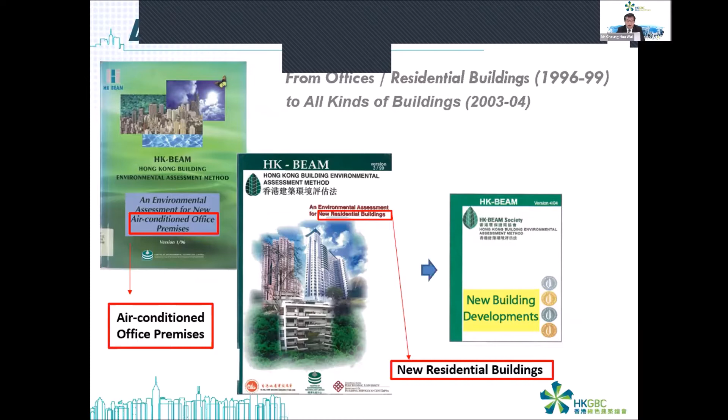Throughout the years, we have been developing the rating system in alignment with the life cycle coverage of green building development. The life cycle coverage includes the initial planning stage of any building development, then design and construction, then upon completion the operation and maintenance of existing buildings, and also throughout the lifetime of a building, fitting out and alteration and additions to existing buildings.

For each of these stages of building development, we have developed an individual rating system. Firstly, for planning, we have a BEAM Plus Neighborhood rating method. For construction and design stage, we have the BEAM Plus New Building rating system. Upon completion, we have BEAM Plus Existing Buildings to deal with the operation and maintenance stage. And finally, throughout its lifetime, we have BEAM Plus Interior, which deals with any interior fitting out and alteration work to existing buildings.

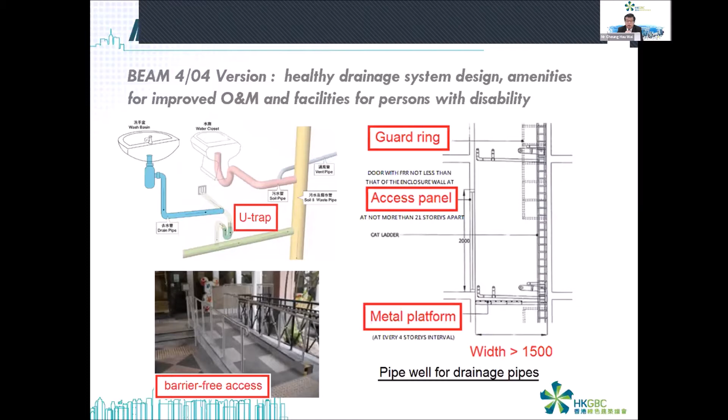The rating system not only covers green building aspects, but also in some way health and safety requirements. As you could see from the screen, there are credits given if a development incorporates certain safety features in buildings, like the provision of guard ring and access for plumbing systems in buildings, the provision of access panel to these fitting outs, and also provision of metal platform for providing a safe working place for inspection and maintenance of drainage systems in buildings.

One of the very important aspects in our densely built environment, like in Hong Kong, is paying a lot of attention to ensuring the movement and utilization of natural air ventilation. So we have issued an urban microclimate study guidebook to provide guidance on how we should dispose our buildings, how they should be sited, how they should be separated sufficiently to allow natural air to run through our built environment, so that there is sufficient natural ventilation within buildings.

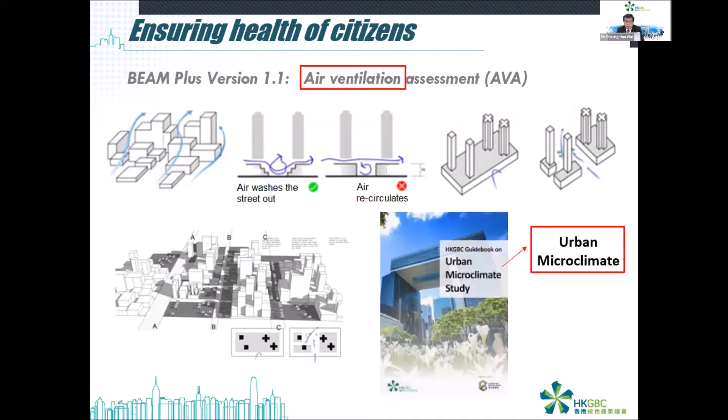Within buildings, there are requirements to deal with the provision of sufficient windows for our living and working environment. There is the need for providing windows in separate parts of our internal environment, such that different parts of the building are adequately lighted and ventilated. These are the requirements to provide cross ventilation within buildings, so that windows are not sited too far apart.

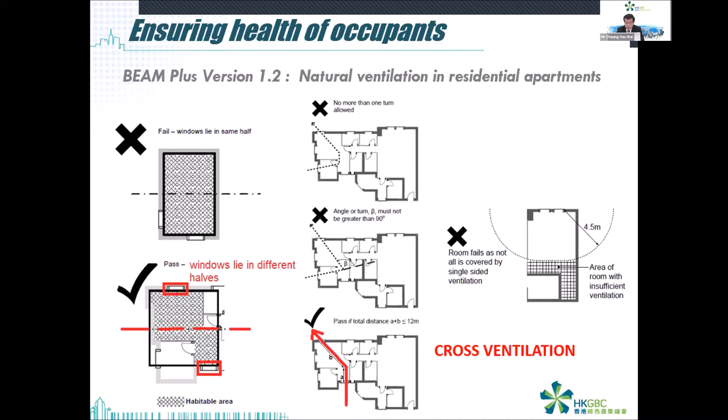There are also credits given for biophilic design, ensuring health and active living and working environment within buildings and also outside buildings.

After the completion of a new building, and also in order to cater for the very large number of existing buildings in Hong Kong which haven't gone through the BEAM Plus new building rating system, there is a very need for retrofitting and recommissioning the electrical and energy use systems in buildings.

So we have started, in the last 3 years, a scheme for retro-commissioning existing buildings. Existing buildings use almost 90% of Hong Kong's electricity, so we believe merely by retro-commissioning, without replacing or renewing the mechanical system, we can achieve a certain amount of saving in energy use.

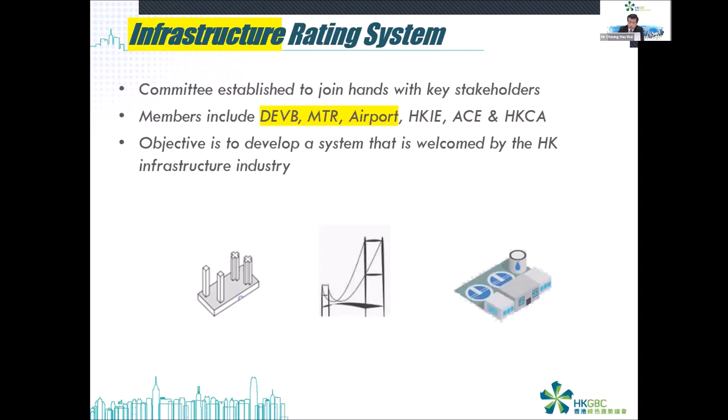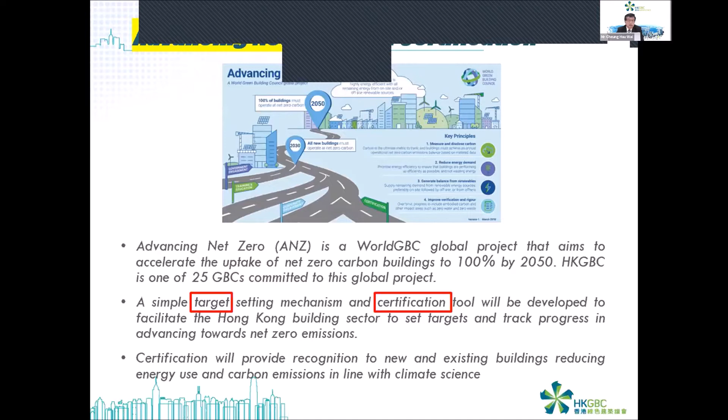Advancing net zero is a new subject which has been advocated by the World Green Building Council, the Hong Kong government itself, and in a way by the United Nations. So we are having a fresh look as to how we should take forward the green building movement and design through the concept of advancing net zero. That is another subject we are having a new look at.

The initial idea is we are considering setting targets for reducing carbon emission in our existing buildings, and also the necessary tools for inducing the reduction of carbon emission.

Contribution of Hong Kong BEAM towards occupational health and safety. In the new version of BEAM Plus, version 2.0, which was only published last year, we have introduced assessing buildability and constructability in the rating system.

As you are well aware, where a building is buildable, then it's safer for its erection. So we think that buildability is not only for efficiency, but also for safety. There are credits given for buildings which incorporate this concept.

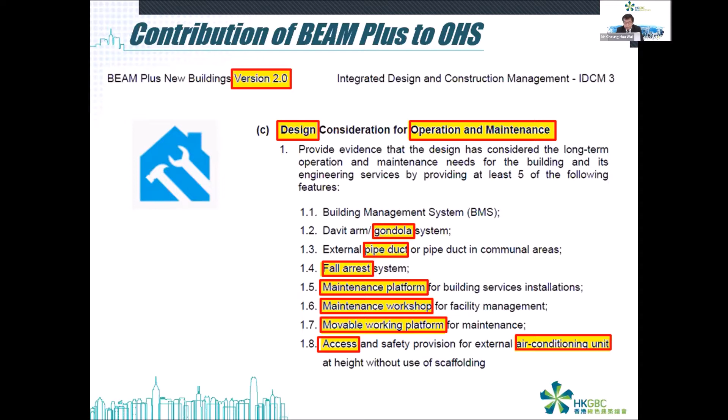In the new version, there is a special section on health and well-being, which requires the provision of sufficient ventilation within buildings, health and active living space, and also inclusive designs for enhancing ventilation and waste disposal, and hopefully in the future waste reuse in the whole built environment.

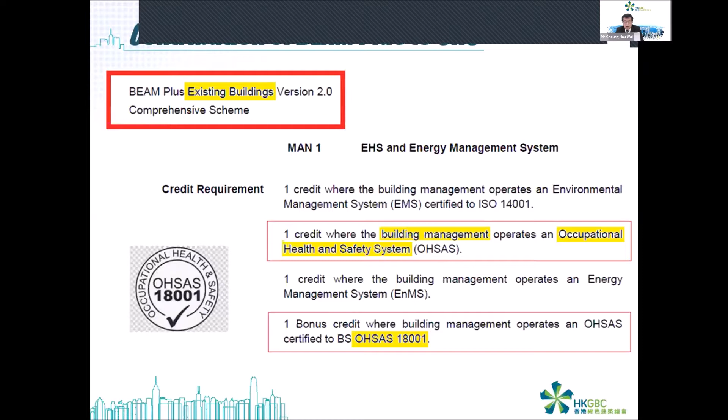In the new existing BEAM Plus rating system, there is also credit given for operating an occupational health and safety system. There are also credits given for OHSAS 18001, being awarded bonus credits.

In the BEAM Plus interior fitting out work, there is a requirement for a safety management plan so that risk assessment is carried out before any fitting out work or alteration work, and a requirement for the provision of personal protective equipment in existing buildings.

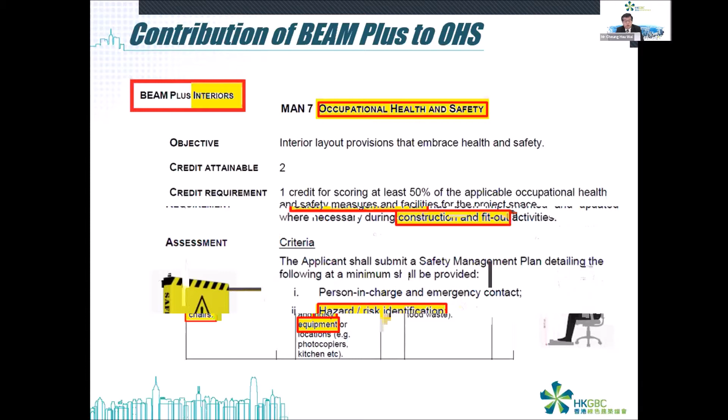In the BEAM Plus existing interior design, there are also requirements to ensure and encourage a healthy and safe working environment, in terms of the provision of adjustable chairs, sound barriers, and also bins for organic waste.

A thought on pay for safety. Actually, before I move on to green buildings, in the Hong Kong Green Building Council I have been working on construction safety in the Hong Kong Construction Industry Council for some years.

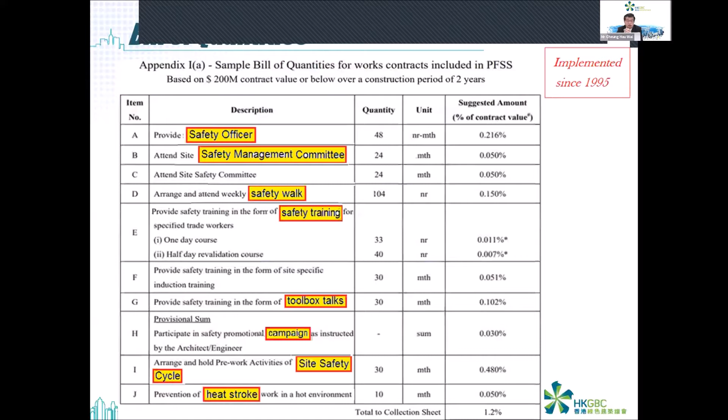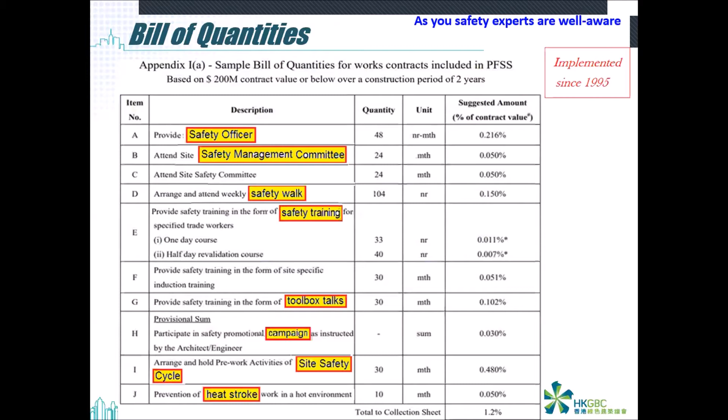So I have always had in my mind how we should be able to improve construction safety. Currently, there is already provision in bills of quantities in Hong Kong to cover the provision of safety officer, safety management committee, safety walk, safety training, toolbox talks, and campaigns in the bills of quantities, so that these safety measures are sufficiently quantified and paid for in a separate bills of quantity dealing with these construction safety requirements.

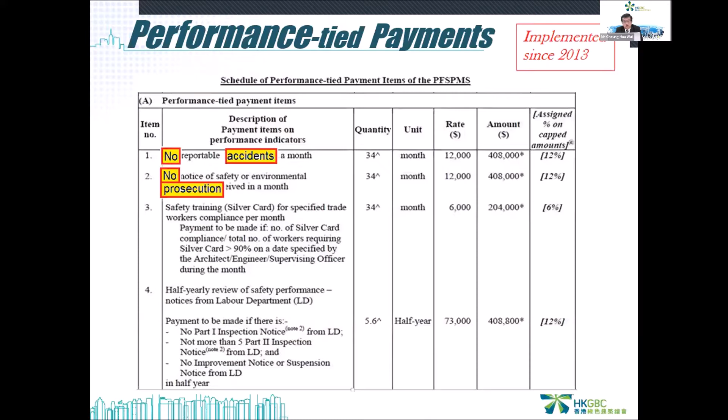There are also rewards or penalties if there was no accident on a construction site and no prosecution for unsafe working methods on the construction site, also provided for in the bills of quantity.

So what I have further thoughts on is, in order to provide a safe working environment on construction sites, as you're probably well aware, better than me, there is a need for safe working platforms, safe working procedures, and safe methods for executing the many different parts and phases of our construction work.

Now, if these safety equipment and provisions on construction sites, and also safe working methods, are separately and sufficiently allowed for in our bills of quantity, then there is a strong incentive for our contractors and workers to adequately provide these safety working equipment on construction sites, and also allow sufficient time for safe working procedures to be followed, so that once these are provided and followed, it's paid for by the developer through the bills of quantity. Then we should be able to have a pay for safety system, hopefully covering the many safety aspects that need pay and cost on our construction sites.

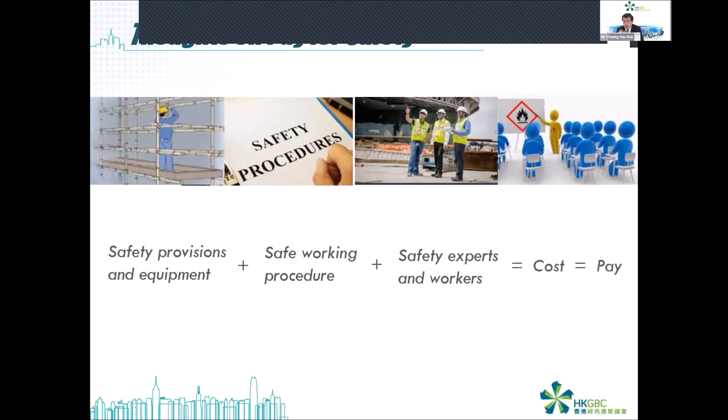We have only last year developed a converter for the purpose of converting from energy use to carbon emission. So we are starting to encourage the use of the converter. It's basically a formula: if you use a certain amount of energy, in terms of electricity, then there is a certain amount of carbon that you will be emitting. So that's the way we are trying to do it.

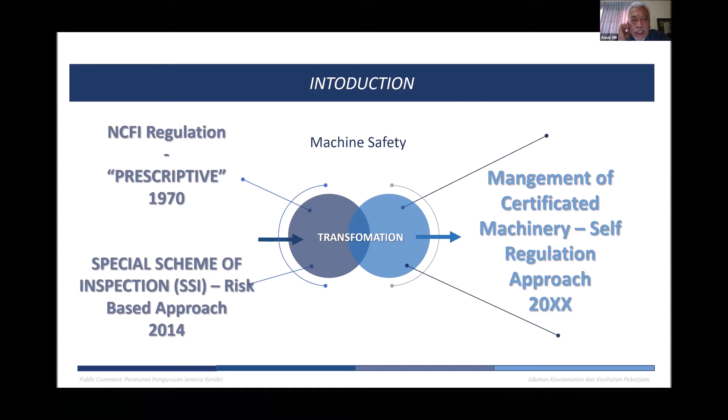As an introduction, we have a specific regulation in Malaysia. Since 1970, we've had a regulation to manage machinery, which is a very old, prescriptive type of regulation incorporating all the technical specifications. Then in 2014, we moved to a risk-based approach, whereby we introduced a special scheme of inspection. And now we are in the midst of introducing a new approach, a total self-regulation approach to manage dangerous machinery in Malaysia.

That's the introduction. So the framework for self-regulation that we use to develop the new regulation is based on the self-regulation concept. First of all, the objective will still be safety and health of workers—that's our objective for this regulation. Another thing we try to incorporate is building a safety and health culture in our workplace. That is our objective.

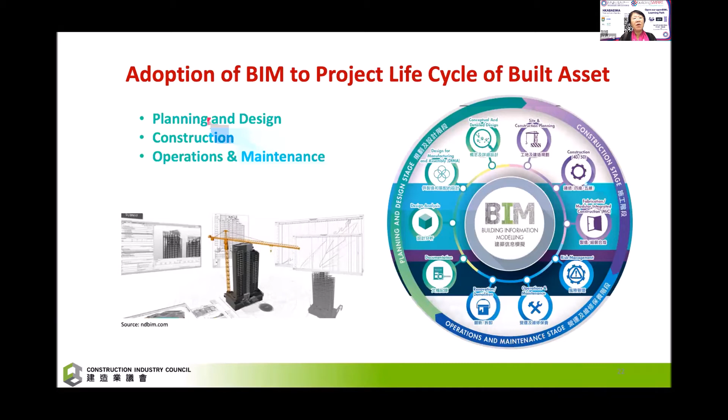So second part, we take a look at BIM in Hong Kong, and the progress of BIM adoption in Hong Kong, from the project lifecycle of built assets—planning and design, construction, operation and maintenance—you can find our support from the Hong Kong Construction Industry Council, the CIC.

And we integrate BIM with technologies and tools in the lifecycle, with data models and different connectivity of software, from the design metrics program requirements, design tools, energy tools, to the commissioning tools and active tests in construction and commissioning, and also occupancy for the information monitoring and diagnostic system with local or web-based, and automated diagnostic tools in operation and maintenance phases. And finally, retrofitting tools for retrofit, renovation and decommissioning.

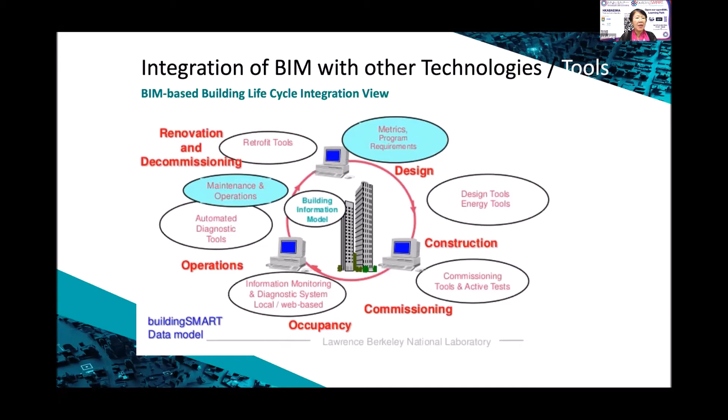So we can use BIM to integrate with various tools and IT systems. For our mission, we collaborate with the built asset industry for closer working collaboration across the entire AECOO community, namely architecture, engineering, construction, operations, and owners.

How do we integrate the policy with objective setting, strategy, standards and guidelines, certification, registration, and also support and implementation? For people, we focus on collaboration and communications, building capacity with cultural value change and training. For process, we integrate with different technologies, methodologies, applications and workflow, and also coordinating and scheduling.

To technology, we have Industry 4.0, Smart City 3.0, Construction 2.0, information management and interoperable technologies.

In the intervening years, government has been moving along, first driven by the private sector and some public bodies, and then in 2018, government mandated that all Hong Kong government projects exceeding 30 million must use BIM.

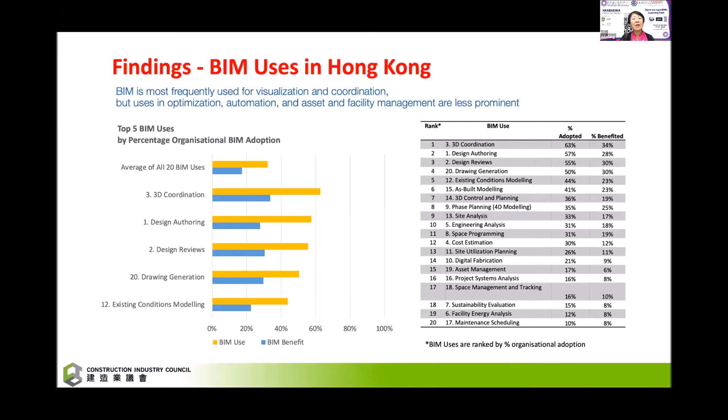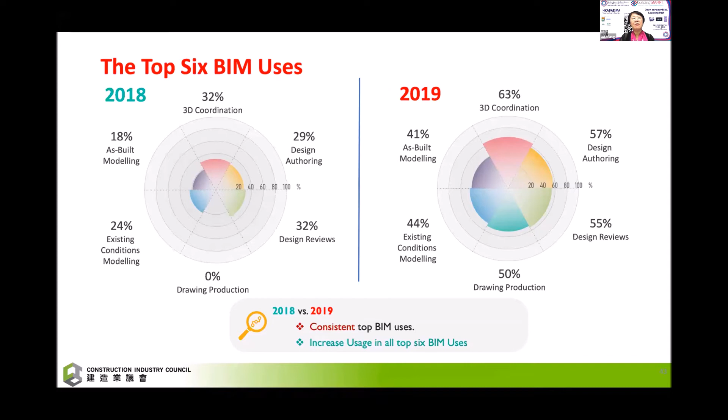Key hurdles of BIM adoption: hurdle 1, lack of BIM resources; hurdle 2, compliance-driven mindset; hurdle 3, difficulties in changing workflows and practices. So our vision for BIM adoption in Hong Kong is to identify hurdles and motivations of adoption, reference success of the leaders and other international examples with a value-driven and BIM-led workflow, and change mindset from compliance-driven, double handling to a more value-driven mindset.

So the way forward is that we'll provide BIM resources such as BIM standards, guidelines, and templates for BIM contract specifications and BIM objects, and provide group-specific BIM training for project teams, technical, contractual, and clients with awareness of BIM benefits. We'll work with regulatory bodies for review and approval of BIM submissions, demonstrate best practice in BIM implementations with case studies and experience sharing, give recognition to exemplary projects and people, continuously benchmark by surveys and KPIs, and facilitate the transition from traditional workflow to BIM-enabled workflows.

So we found that this is filtering down from the public sector, government regulators and government procurers, public sector procurers, to private sector developers, then to consultants, to contractors and subcontractors. We can see this cascading happening over the last 2 years. And now this year, subcontractors are demanding more BIM training from us.

For BIM strategy, for design we can have design for safety, and build IoT and site safety, and operate with VR operation and safety training, and IoT for staff and visitor safety. For safety management, we have design for safety with BIM, planning of safe working sequence and safer working methods, safety training and education, safety planning, job hazard analysis, pre-task planning, and site safety management.

For BIM in Housing Authority, application encompasses the full design and construction cycle from investigation to scheme design, detail design, from planning stage to design stage to construction stage, statutory submissions, completion, and post-completion.

And for BIM for the Drainage Services Department, with the San Wai sewage treatment works project, we have asset management, design, construction, safety, AR, VR applications, point cloud, and coordination.

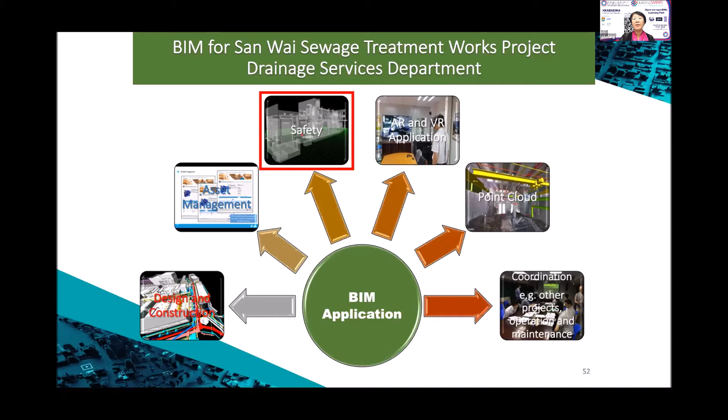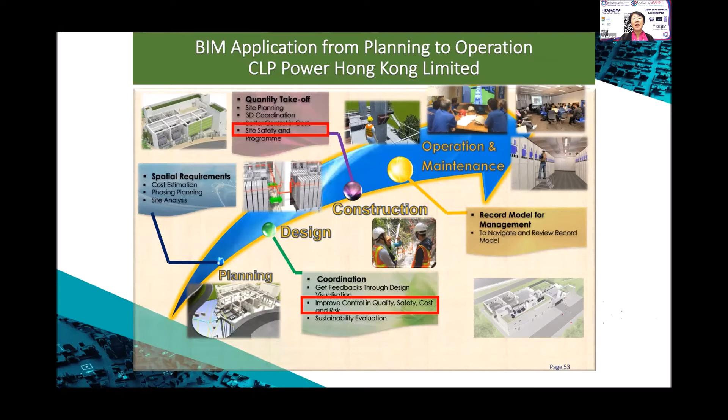And for BIM application from planning to operation with CLP Power Hong Kong Limited, quantity takeoff with site safety and spatial requirements, design, planning, construction, and operations. So a lot of these organizations have been embracing safety and BIM in their practices and using it holistically.

And for BIM asset management and railway safety, for EMSD, we extend BIM usage in the railway industry from construction stage to asset management stage, visualizing the results of artificial intelligence data, analytics of historical and real-time data on a BIM platform, predictive maintenance, and enhanced safety training. We also use BIM in the design stage, working with the future operator on safety issues for O&M activities.

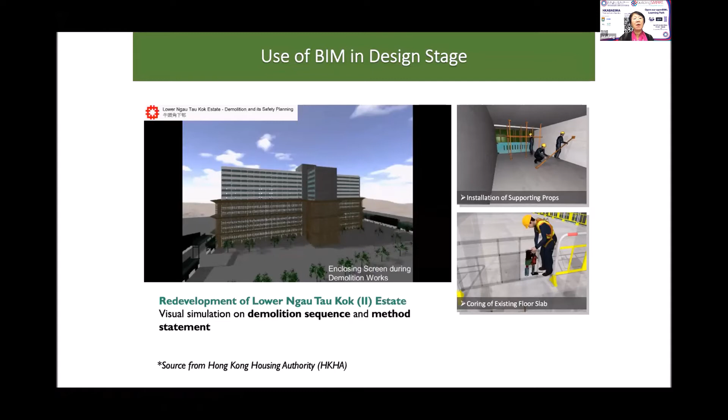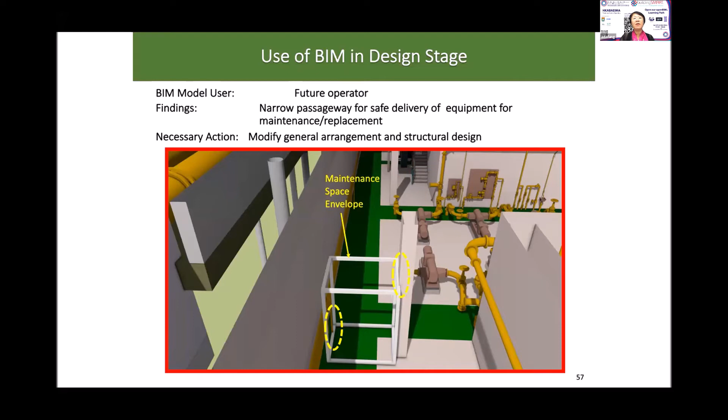This is for the demolition of Lower Ngau Tau Kok Estate, the first precast building block to be demolished, using visualization of the demolition sequence and method statements, with 0 accidents. Also using BIM in the design stage with the future operator, for a narrow passageway for safe delivery of equipment for maintenance and replacement, with modified general arrangements and structural design, and a view of the BIM model after revision of design.

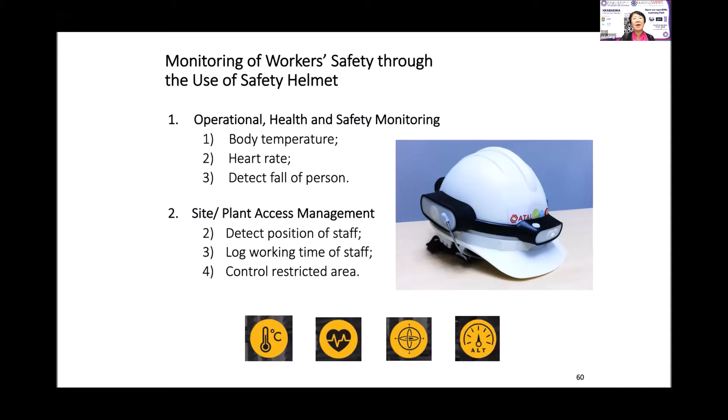For the construction stage, IoT safety helmets and the BIM model enhance safety for confined space workers. This can be used for monitoring workers' safety through safety helmets for occupational health and safety monitoring, body temperature, heart rate, detecting falls, and for site and plant access management. For the management portal, data transfers to a cloud-based management portal, location shown in the BIM model, and alerts issued when abnormal conditions are detected. And for targets, VR users see site video from IoT safety helmets and the BIM model at the San Wai sewage treatment plant, phase 1.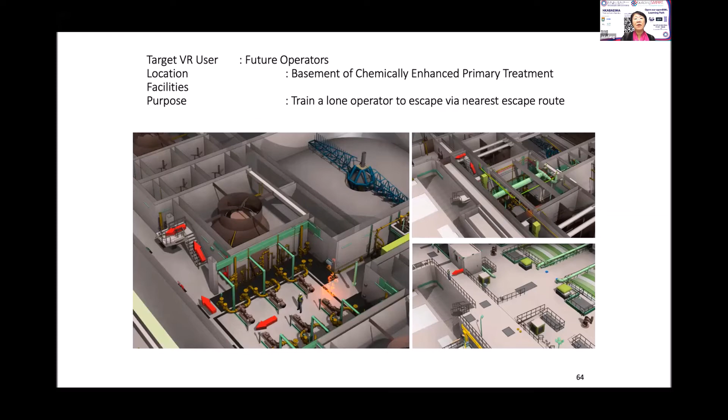This shows location is the basement of the chemically enhanced primary treatment. The purpose is to train a lone operator to escape via the nearest escape route using BIM simulations.

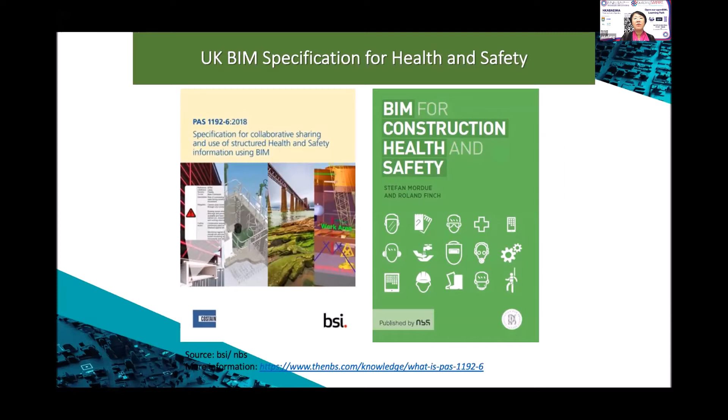This aligns with UK BIM specifications for health and safety, like PAS 1192 Part 6, and BIM for construction health and safety. CIC has also worked on safety with the Safety Experience Training Center, IoT-enabled, distributing VR work-at-height training kits to sites for contractors to use.

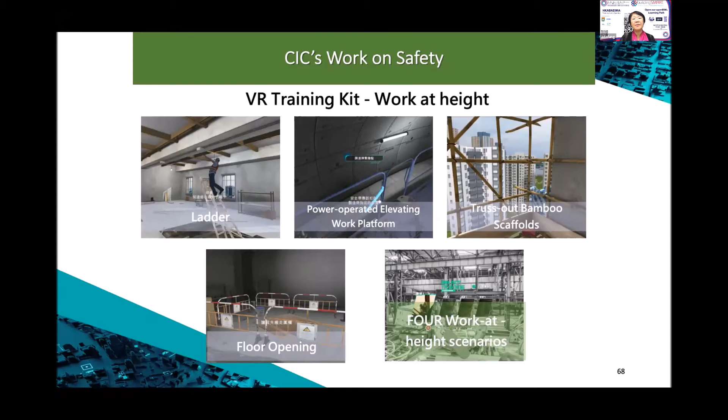Part 3 is about cultural change from housing authorities' experience. The first aim is to reduce high-risk activities, so innovation and functional safety installations are important.

Contractors' innovations are recognized by safety auditors, recommended by OSHC, and approved by project teams for payment under the Pay for Safety scheme. So what was innovative in previous years becomes normal practice nowadays, and what is innovative today becomes normal practice in future.

Take a look at design for safety. Hazards exist around the home, in external areas, and outside property boundaries, so we design for these occasions comprehensively for the safety, health and well-being of people of all ages and abilities.

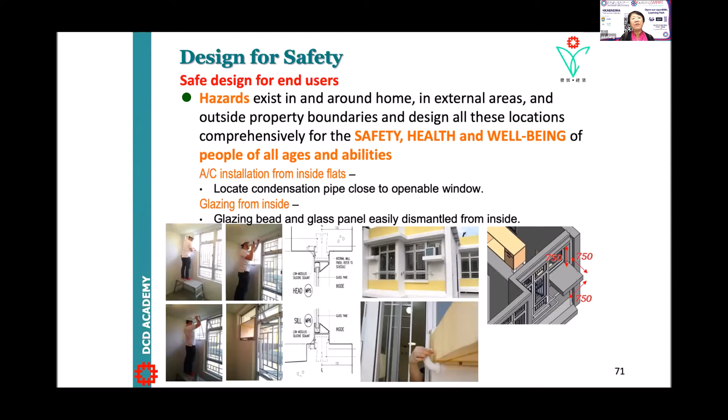For example, air conditioning installations are done from inside the flats, so there's no need to go outside to install air conditioners. Condensate pipes are located close to openable windows, and glazing beads and glass panels can be easily dismantled from inside.

Safe design is also important for maintenance and cleansing staff, who have to work in potentially hazardous locations such as roofs and plant rooms. So we provide safe access and protected working space at the design stage.

We have to visualize these upfront and enable provision of railings to prevent accidents from falls, and provide locked access from inside the building at the same level.

Stairs are preferable to cat ladders where access stairs are feasible, but where staircases are impractical, we provide flat surfaces to stand on.

These are the considerations for different users, including cleansing and maintenance staff, right up front at the design and planning stages, with safe design for construction workers as well.

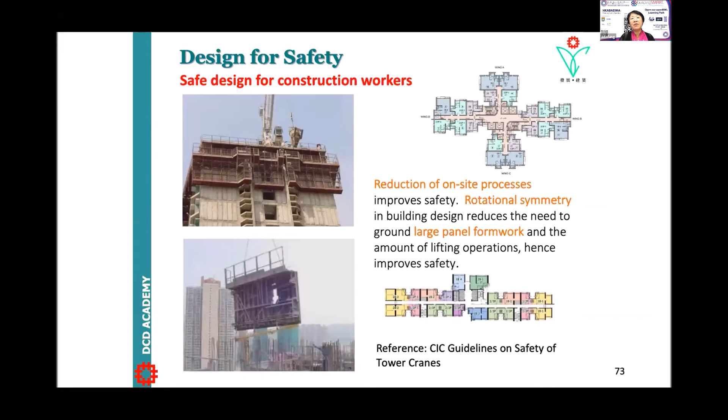We reduce on-site processes to improve site safety. Rotational symmetry in building design reduces the need to ground large panel formwork and the amount of lifting operations, hence improving safety. An integrated example is providing the upper roof with safe access.

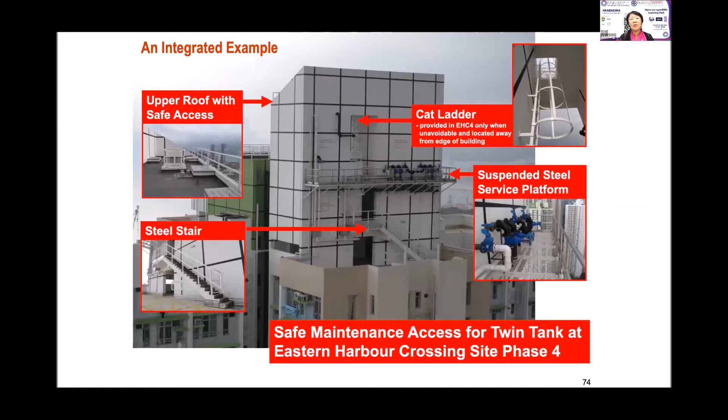Sometimes we still have to provide cat ladders with short runs, but mostly use steel stairs where possible, and suspended steel working platforms for service, along with safe access for twin tanks at the site.

We also provide safe access for maintenance of M&E equipment at high level, and parapets of adequate strength to allow proper access and electricity supply for fixing and powering gondolas for subsequent building maintenance over the whole life cycle of buildings. Buildings are designed to last 100 years and provide protection via safety lifelines over sharp edges of parapets.

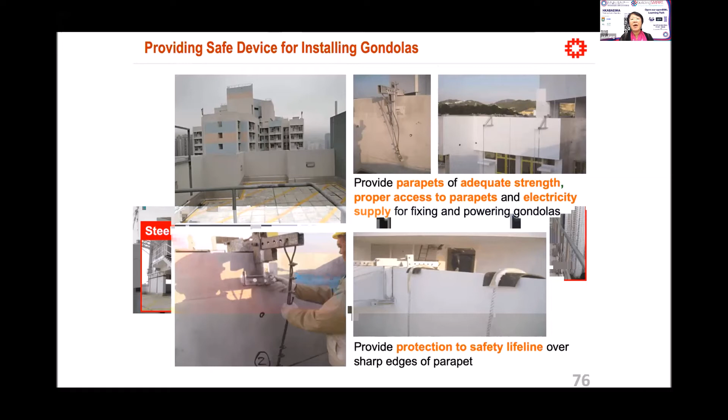Innovative and functional installations use BIM and RFID on site. These can support a lot of equipment, like VR training and building information modeling for safety training, helping people understand work procedures and method statements with foreseeable risks and hazards through visualized, dynamic presentation.

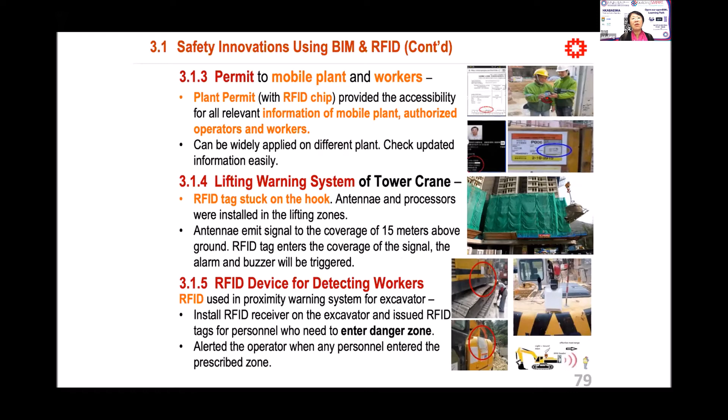There are also permit systems for mobile plant and workers. With plant permit RFID chips, we provide accessibility to all relevant information on mobile plants, authorized operators and workers, and a lifting warning system for tower cranes with RFID tags and devices for detecting workers.

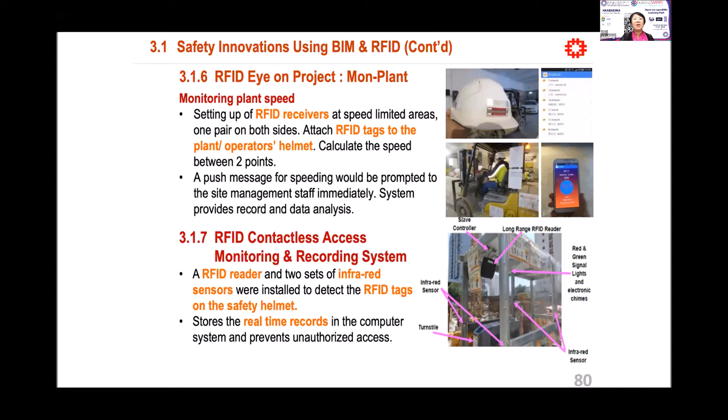There's also RFID-eye on the project for monitoring plant speed, RFID contactless access monitoring and recording systems, and mobile apps that help enable easy access to information and records for site staff.

This includes instant validation of plant and equipment through cloud technology, and management using smart devices for safety management systems to record and monitor.

There's also development of construction site mobile systems for safety and quality records, which can ensure streamlined management of safety, quality, and productivity on site.

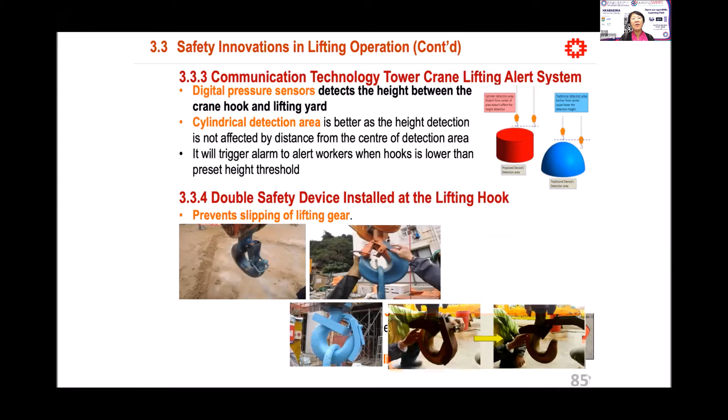For lifting operations, there are mobile alarming systems and video for site-specific safety training on lifting safety, communication technology, tower crane lifting alert systems, and double safety devices installed at the lifting hook to prevent slipping of lifting gear. Safety innovations also include certified C-clamps for lifting gear, tailor-designed lifting gear, and spring grip clips with remote control.

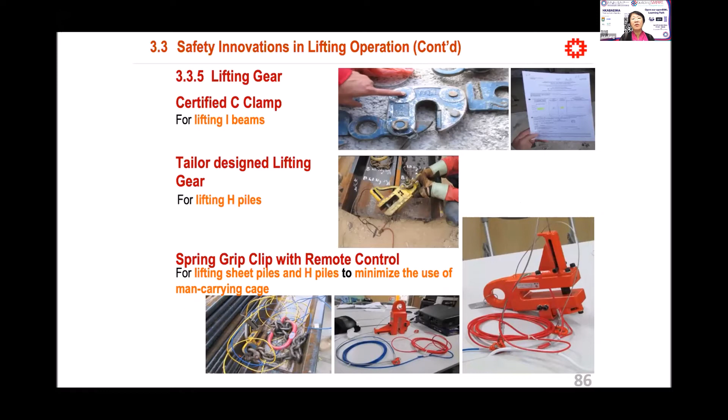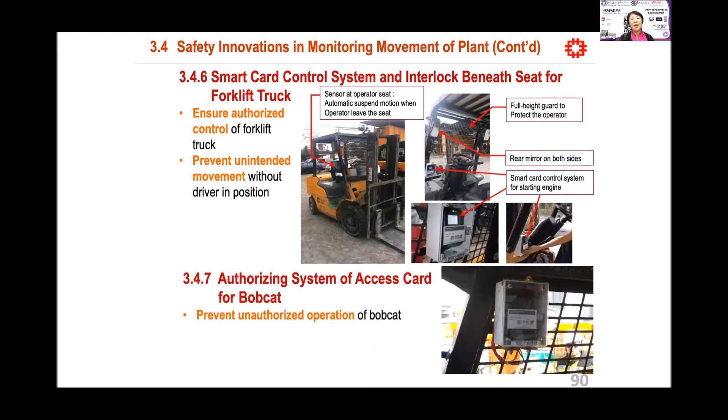And for monitoring of movement of plants, there can be audio-visual alarm systems in gondolas, remote-controlled concrete skip, and wireless reversing video devices for vehicles, CCTV systems for mechanical plants, remote CCTV surveillance monitoring systems. And all these can be interconnected and related. A smart card control system and interlock beneath seat for forklift trucks, authorizing system of access card for bobcats.

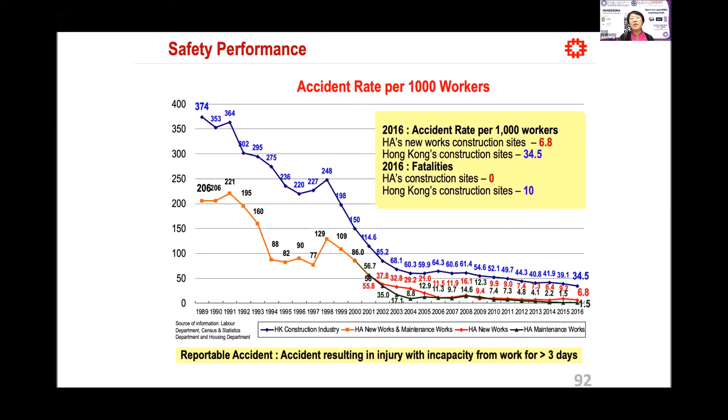And for sustained improvements, we need cultural change. We'll take a look at the accident rates per 1,000 workers since 1989 until captured through 2016. It has dropped dramatically. Accident rates for about 1,000 workers in 2016 for Housing Authority's new works is 6.8, and for Hong Kong is 34.5 for an average. And for that year, fatality for Hong Kong housing authority is 0, and Hong Kong all sites is 10. And you would analyze it.

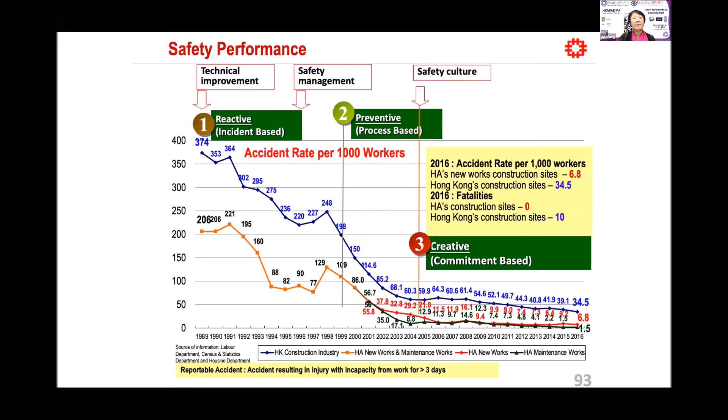For the first phase, we call it technical improvements since the early 90s with reactive and incident-based systems. And then we have safety management later on, with preventive and process-based operations introduced. And the third phase is the change of safety culture around the early millennium. And then you can see that accidents has dropped dramatically. And be creative and committed. So how to walk the talk?

So it's everyone's business and all own responsibility to prevent accidents. And then trade unions deliver safety talks to workers during lunchtime on site. Again, all own this shared responsibility to prevent accidents. So advocating safety culture, safety experts, we hope that you can train workers to be safety trainers as well, so all own this responsibility and action to prevent accidents.

And how to change workers' mindsets from 'you want me to do it' to 'I want to do it safely.' And all own this responsibility, and peer support is very important as well.

So finally, I'll advocate for a way forward. First is to embrace digitalization in information technology in this digital era. Second, to engage people, nurture safety culture, walk with them. And thirdly, go for holistic solutions and go the extra mile. So safety is a long journey that has a starting point, but no ending point. Let's go the extra mile. A journey of 1,000 miles begins with a single step. Thank you.

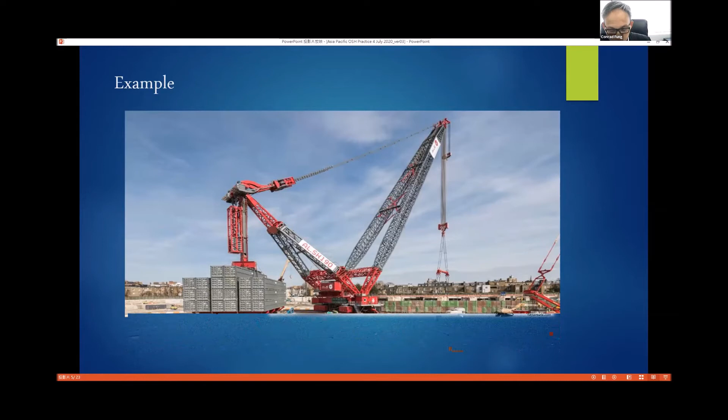Look at one real example that happened in one of my sites before. So we do have a mobile crane unloading material to the construction site. And the safety officer found out the lifting chain has not been tested. So the operator is not allowed to unload the material already delivered at the front door of the site. But the general foreman say the site needs those material to carry out the work for tomorrow. So what would he do in a situation like this?

So if you are working in a construction site, I think you would share my view that this kind of incidents happen almost every day. So I can give you hundreds and hundreds of similar examples.

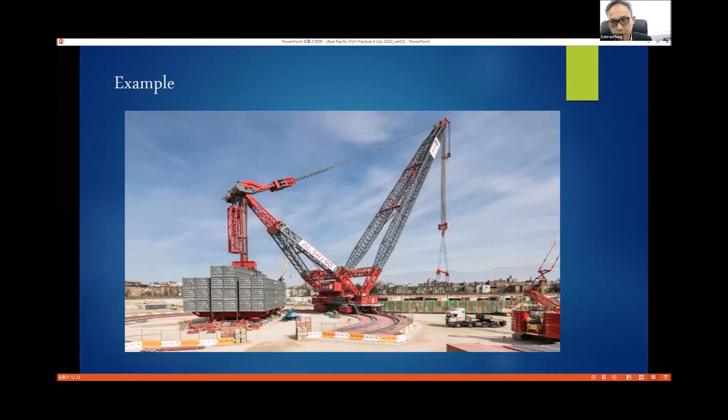So what happened then? I believe there is a common misconception of the site personnel that they all think site safety is the safety officer's responsibility. So even though the lifting chain has not been tested, so what? It's nothing to do with me. It's the safety officer's concern. So my own concern is get the job done and unload the material for the work I need to carry out.

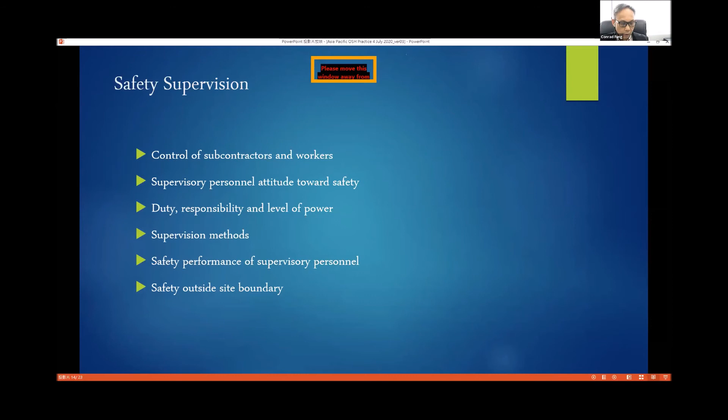The next one is site condition. Site tidiness can always eliminate accidents on site.

Hygiene and health issues, like COVID-19. I know really high COVID-19 cases happened in site accommodation, I think in Singapore, happened in the construction site. So the hygienic problem is also a big concern.

The work environment - is it sufficient working space, lighting for the worker, plant and machinery?

People always underestimate the danger caused by plant and machinery. Numerous accidents happen because of moving plant and machinery, like an excavator - the operator didn't realize a worker was working next to his machine.

And electricity hazard, I have mentioned in the previous slide, is always a problem.

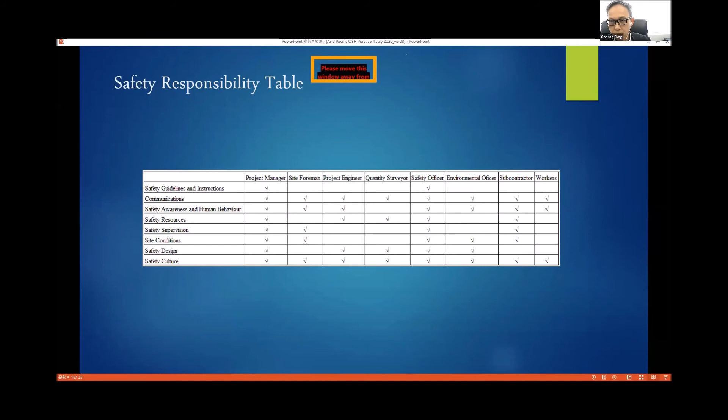So what are the barriers to the effective implementation of site safety? Time, cost, negative attitude, lack of management commitment, unclear role and responsibility, inadequate training, and poor communication.

So what are the tips? What are the actions you need to take? Okay, for safety, adopt new technology.

We do have virtual reality, mobile apps, safety alert systems. Adopt new construction methods: MIC, BIM, DFMA. Make use of the available funding schemes by the local government in Hong Kong - we have CITF, and also the Hong Kong Construction Association has a construction safety fund.

And of course, to promote safety culture: assign clear roles and responsibility, reinforce safety infrastructure, involve key stakeholders, and better communication. To conclude what I have shared with you - it is unnecessary to prioritize safety over other site aspects, but safety can be a built-in element in every site activity, from planning and design to the execution of work, with everyone's involvement, and most importantly, top management commitment. Thank you.

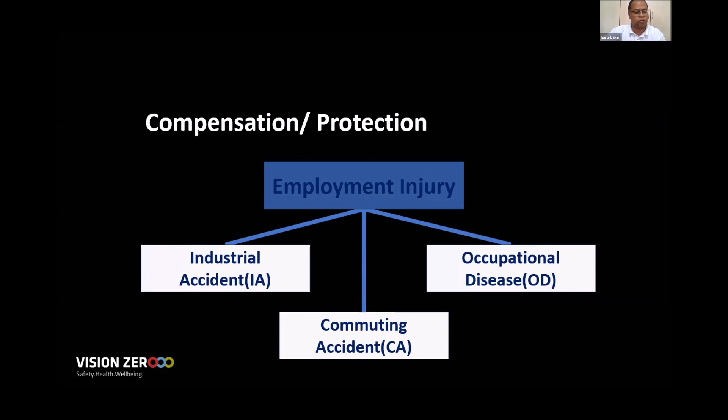Let's get back to the topic of commuting accidents. Under our coverage in Malaysia, any accident happening to workers while traveling en route between their place of residence and their place of work is covered. If an accident happens on a journey made for any reason directly connected to employment, it is covered - for example, when sending a parcel for Pos Malaysia, an accident happening is covered under our scheme. Also under commuting accidents, under Section 24, if an accident happens to workers traveling from the place of work to the place where they take their meal, or during any authorized recess, they are also covered by the Social Security Organization in Malaysia.

So here's the coverage in Malaysia, and you can see the accidents happening. From the statistics, there are occupational accidents at the workplace, and also accidents during commuting. The trend shows the number slightly increasing for the last few years. The number of occupational accidents for the past 10 years was really high, then going down, but for the past 1 or 2 years it's already increasing again.

And for commuting accidents, you can see from the trend line. This is the industrial accident, and the one below is the commuting accident. The commuting accident trend has always been increasing for the past 15 years.

So this is the issue in Malaysia, and we as a social security body, together with our partners, need to do programs to at least cover this issue.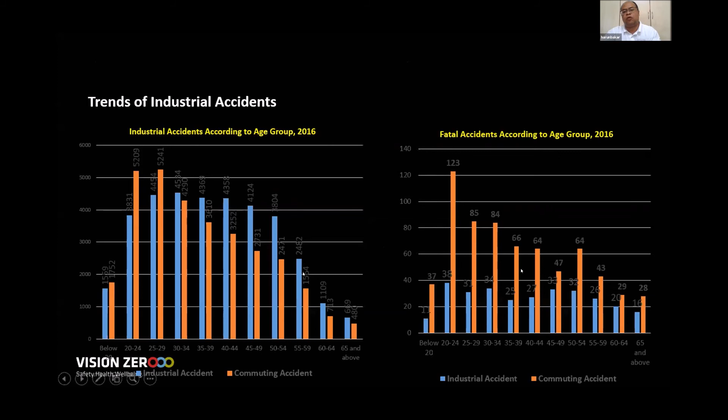And every accident changes life. We all know this. Every time an accident happens, whether at work or on the road or at any other place, there will likely be a victim or victims. And these victims may end up with injuries, sometimes with impairment or disability.

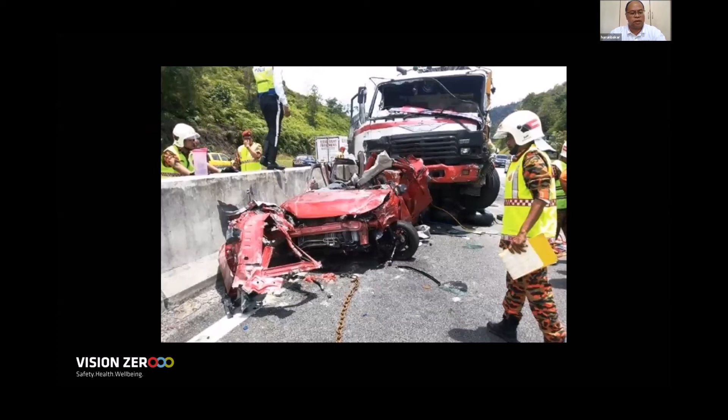We know this firsthand because we receive more than 70,000 cases a year, and I'm sure there are more accidents out there, most probably not in our radar. But one thing is certain: if an accident happens, it may cause injuries. Of those injured, some die as a result, some recover fully, but some end up with permanent disability. And this injury changes life.

Behind every person, there are others relying on them for their livelihood - the family. There are families, parents, children, and spouses whose lives change when someone is involved in an accident. In Social Security, we see the effects of injury and death every single day. With every loss of a breadwinner in the family, we also lose a role model to the children. We have seen families disrupted, children neglected, and parents broken-hearted.

Whenever we think about accidents, whether on the road or at the workplace, bear in mind that the injuries resulting from the accident will affect the workers who are injured as well as their families.

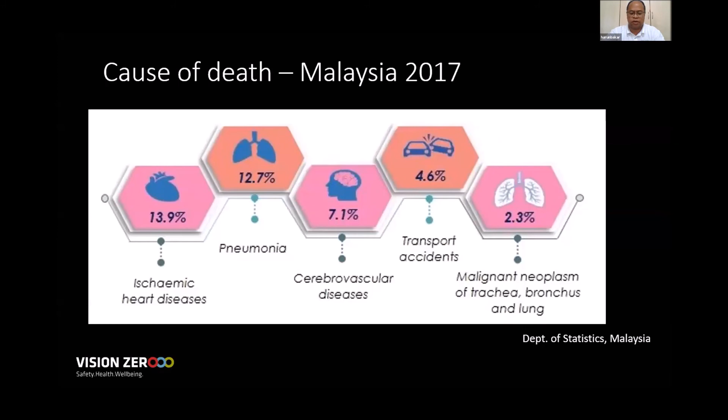In Malaysia, how do we tolerate these deaths and accidents? We can see here the causes of death in Malaysia as reported by the Department of Statistics. Transport accidents were actually the fourth major cause of death among Malaysians in 2017, most probably also in 2018 and 2019. Accidents have become so much part of our society that it ranks very high as a cause of death in our country.

And transport accidents are even more devastating. If we look closely at the ratio of who died in these accidents, transport accidents are the main cause of death among our younger generation. You can see the people aged 0 to 14 - when they are just children, this is the most vulnerable part.

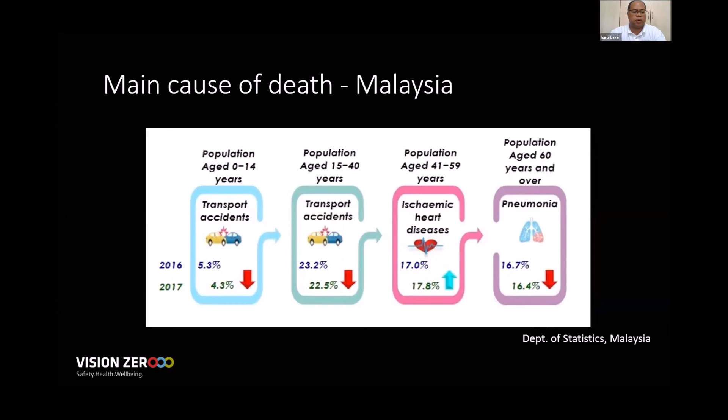This is a major problem in Malaysia, or most probably you could say it's quite normal - something we read every day in the newspaper or online news. Unfortunately, in Malaysia we also have the third highest death rate caused by road accidents in Asia. And not only in Asia - in terms of the riskiest roads, we are third in the world. When you look at the world's riskiest roads, deaths by accidents are very common indeed in our country.

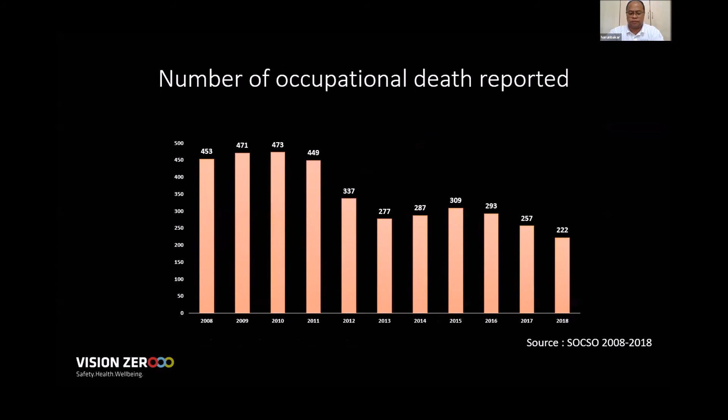And what about deaths due to occupational accidents? Of course, we can say this number is much lower, 222, but 222 is still a number - still a worker lost there. This is the trend of industrial accidents reported for the past 10 years. You may see the trend line of accidents is quite stagnant, meaning the number is almost the same for the past 10 years.

Can we still accept that we should have almost 40,000 industrial accidents every year in Malaysia? That's the question. If you divide by the number of days, you can say at least 100 workers have accidents due to industrial accidents every day in Malaysia.

In contrast, deaths from commuting accidents triple the deaths from industrial accidents. For the past few years, in 2018, the number of deaths for industrial accidents was 222, while the number of deaths from commuting accidents or work-related road accidents was around 666.

When we go to work, the norm is that we should safely arrive at our workplace, perform our duty, finish our work, and then go home safely. That should be the norm. But if you look at these figures, every day there will be at least 3 workers who could not make it home every day. They could possibly die at the workplace or on the road on the way home.

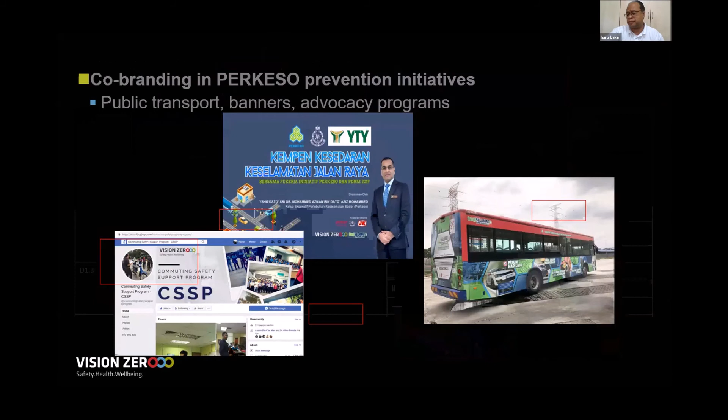And we try to do co-branding in PERKESO prevention initiatives, in public transport, banners, advocacy programs. We have buses with the Vision Zero symbol and logo, and we use mainstream media and also alternative platforms in terms of promotion of Vision Zero.

In terms of improving literacy and resources, we have translated the guidelines of Vision Zero into the Malay language. This is also already incorporated into the Vision Zero Global online platform, so you can get this guideline from the website.

And we try to simplify the Vision Zero guidelines into something practical that can be implemented by the IKS, small scale industry. Due to COVID-19 this was currently halted, but hopefully by next month we can complete this project.

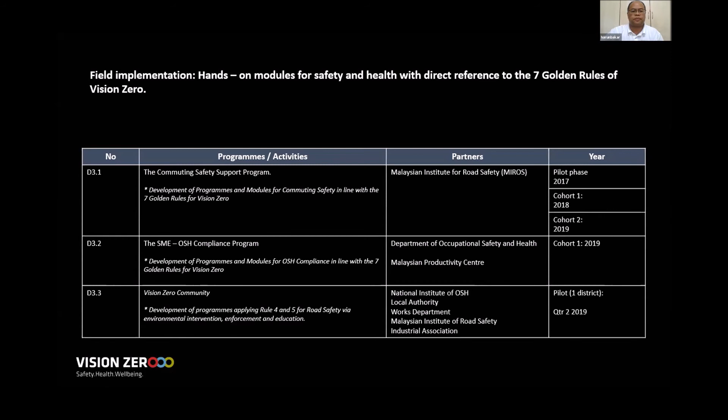We call it CSSP, the Commuting Safety Support Program. We try to embed these 7 Vision Zero elements, from the leadership, define target, identify hazards, and so on, until the investment in people.

So what we do is engage the companies with the highest number of commuting accidents in Malaysia. We go to the company and train them with the skills, sort of like a train-the-trainer program. From the baseline statistics of the accidents, we can see the profile of the company in terms of commuting accidents, and we try to tackle the company using their own profile.

From that, we do the intervention - engagement with the workers, awareness, and a hands-on approach in terms of intervention - and after that we do the evaluation part.

Among the activities in this program is measuring the road safety performance baseline data, based on ISO 39002, the good practices in implementing a commuting safety management system. This is where we take the independent variables - the programs conducted, the training, the commuting routes being mapped, the inspected vehicles, and so on - then compare them to the dependent variables, the accidents, injury related outcomes, and riding behavior. So this will be measured.

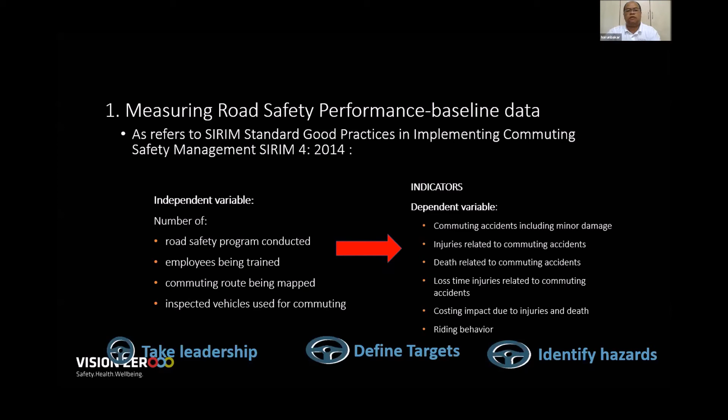Then there will be the trainer, the route hazard mapping training, the engagement program with the safety committee, and also with the workers who ride motorbikes.

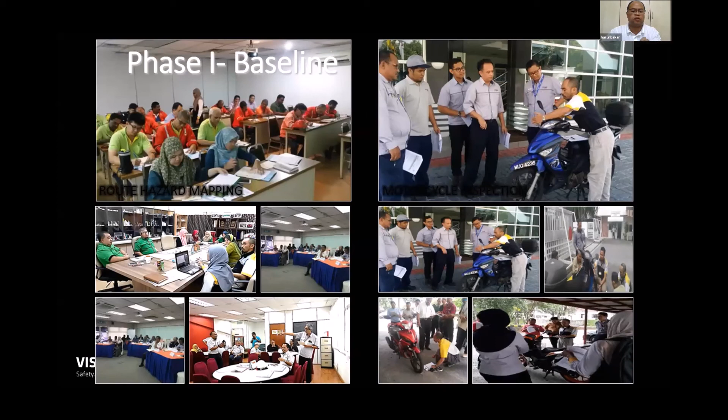We develop the program based on the root cause - we look at the factors of human, vehicle, and road and environment. From that company profile, we develop the program and then implement it using the module that is suitable for that company.

And this is among the train-the-trainer program modules. In Module 1, we try to integrate road safety elements into the existing OSH policy. We train the committee to develop road hazard mapping for their staff, so every staff member should have their own mapping in terms of road hazards. There's also the family safety reminder card - a simple reminder card for every employee to advise them to ride the vehicle safely. And Module 5 is motorcycle daily inspection.

Number 4, continuous and focus-based intervention program. This is among the program, part of ensuring safety and health in machines under the 7 Vision Zero golden rules. Among the activities are motorcycle daily inspection, defensive riding training, community safety talks and surveys, and fitness to ride.

This is among the program to do in terms of improving their competency. We also do the defensive riding demonstration, focusing on braking and cornering. This is part of ensuring a safe and healthy system.

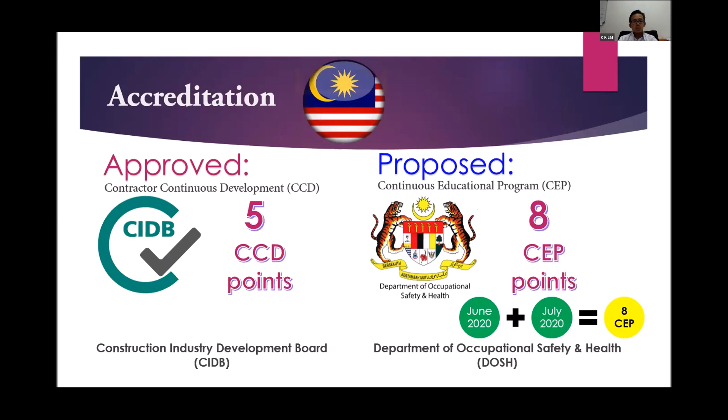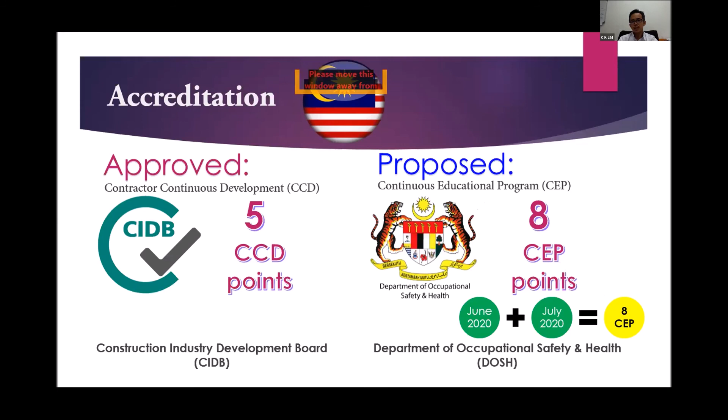Next, just some information: we do get approval from CIDB, so 5 CCD points, contractor continuous development, officially approved by CIDB. Also, unofficially, DOSH has agreed to provide 8 CEP points for those who have attended 2 webinar sessions, so you are entitled to 8 CEP points. Lastly, on the CPD point, continuing professional development, whoever has completed the whole session and stayed with us throughout will be awarded 3.5 hours of CPD point.

Once again, I would like to thank everyone for spending your valuable time with us, and hopefully you found it valuable, and will be able to leverage the information provided to help you gain insight as well as grow your business and your career.